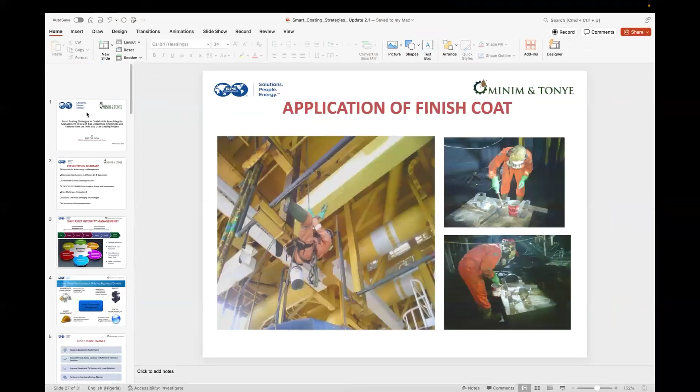So today, basically, we'll be talking about strategic coating, smart coating strategy for sustainable asset integrity management in oil and gas operations, challenges and lessons learned from INIM and USAN projects. That's what we'll be talking about. Now we have a roadmap for this presentation: the rationale for asset integrity management, corrosion mechanisms in offshore oil and gas assets, advanced and smart coating solutions, then the main topic covering INIM and USAN scope and deployment, key challenges encountered, lessons learned, emerging technologies, and finally conclusion and recommendations.

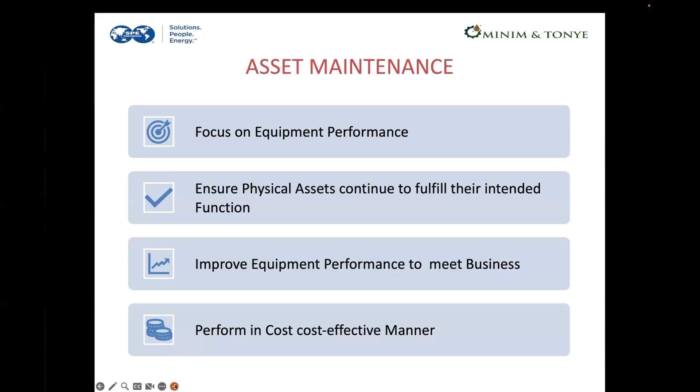People produce oil all over the world, in various places like Saudi Arabia, and everybody has different challenges that they face. Ours from the Niger Delta is quite different, so we have to make sure that the cost of doing this is within budget and is competitive.

That brings us to another topic, which is, what are the objectives of asset maintenance? What do we plan to gain by carrying out asset maintenance?

One, we reduce unplanned downtime. Once you have a downtime, you have a lot of facilities going down, a lot of costs, both human, leased equipment, and commitment to delivery.

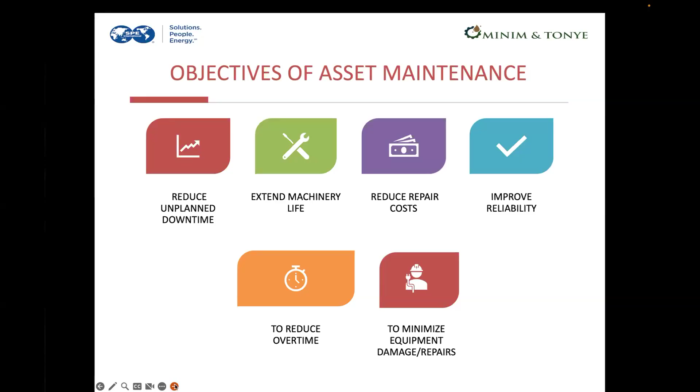Also, you can have extended machinery lifespan, which means the lifespan of the facilities on board can serve for a longer period when they are properly maintained, other than when they are left undone. We can reduce cost of repair, improve reliability, and reduce overtime to minimize equipment damage and repair.

That brings us closer to the topic that we really desire to talk about: corrosion. The whole essence of today's presentation is all about corrosion. How do we manage corrosion? So we need to understand what corrosion means and how we come about corrosion.

In simple terms, corrosion is the gradual deterioration of material, typically metals, caused by chemical or electrochemical reactions with the environment. One key factor that comes to mind when it comes to corrosion is that the environment plays a big role. It is the process of deterioration and destruction and consequent loss of a solid metal attacked by its environment at its surface.

If you really look at it, all corrosion means is the interference between our equipment, our structures, our facilities, and the environment. We can't run away from the environment, so we have to take care of what is going to degrade the facility, which is corrosion.

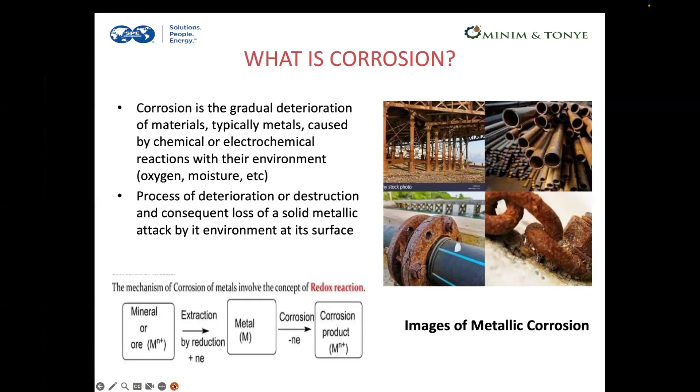Having this in mind, I know many of you understand the chemistry of corrosion, oxygen attacking a metal surface and finding oxidation. The primary thing is nature on its own wants all metals to be stable. That's why they want to get them oxidized.

If they get oxidized, they return back to a stable state and they get destroyed and damaged. So why do we have to control corrosion? As a strategy, as a maintenance strategy, corrosion control is actually a maintenance strategy that can increase the lifespan of our facility. The table here generally shows us the various categories of maintenance

and what can be done to them: preventive maintenance, coating, cathodic protection and inhibitors, purpose prevent corrosion. Various kinds of maintenance category and the purpose for which they are meant. Examples have been shown in this table.

It is my belief that this slide will be shared with you so that you can have additional insight into what we are about to talk about today. Because these are just the preambles leading us to the destination. We need to understand the reason why we are coming this way.

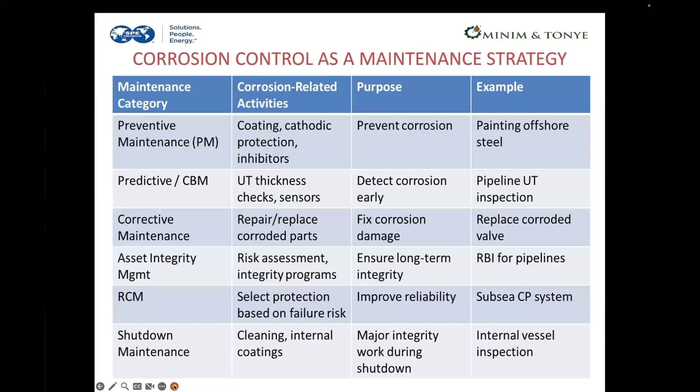That's why we dedicate today to bring insight into the knowledge we have had and share some of the challenges with you.

So what are the factors affecting corrosion? You have the physical state, the purity of the metal, position of metal in the galvanic series, nature of corroding environment, things that affect corrosion: temperature, humidity, effect of pH, presence of impurity in the atmosphere, conductance of electrolytic medium.

Sometimes the metals that you find in this facility, some of them have some level of impurity, which means they can actually get corroded more easily. Now also the location in which we are operating, some land, some swamp, some in the high sea.

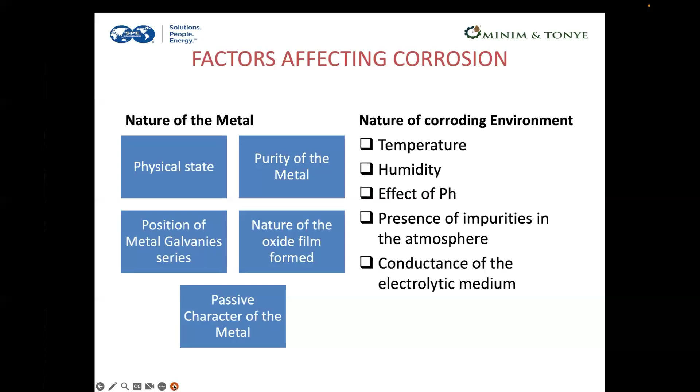But the one we'll be talking about today is deep water. Inim is in the deep water. Usan is in the deep water. I will show you exactly where it is.

So here, what are the control measures? How do we prevent corrosion? We can create barrier protections, sacrificial protection, cathodic protection, alloy formation.

Alloy formation takes place maybe at the initial part when you are planning the plant on its own. You look at various metals that can act in various ways, that can be more efficient in the process of the crude or gas production.

So protective measures, what are the protective measures that we are going to do? Modifying the environment, that's maybe very little. Corrosion inhibitors, perfect. Metallic coating and electroplating.

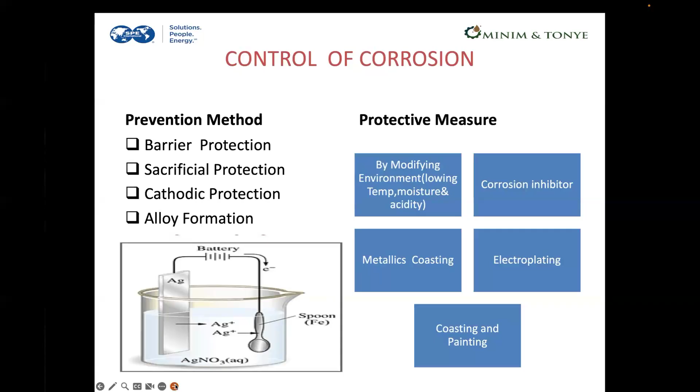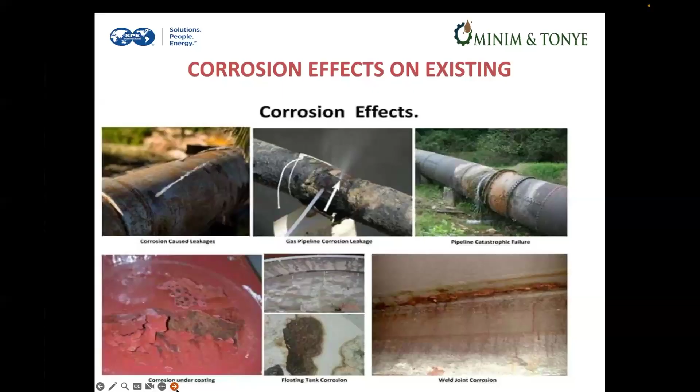Here's just a progressive picture to show you how it affects various equipment as well, and pipings, steel structures, structural members.

Why do we have to mitigate against corrosion? The reason is so obvious. The cost implication of corrosion in the oil market is very high. I think these statistics, we got them from Grand View Research, so we give them the credit for providing us this information

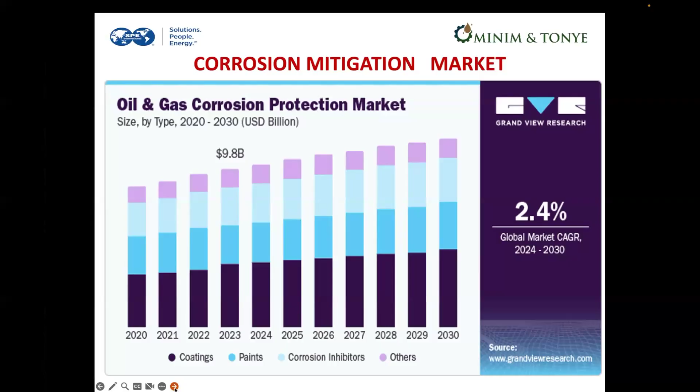of what has been happening in the past from 2020 and their projection up to 2030. These are indicators why we need to go and protect these assets against corrosion. So today's main topic, we are just getting closer.

We're getting closer to where we are going. Like I said earlier, all those ones are preambles to lead us to say, okay, what are we trying to talk about? Why do we have to do all this thing? Why is this kind of process necessary?

Then how come? Why is it costing so much? We've seen that the cost implication runs into millions or billions of dollars, according to the research that has been done. So today, basically, we'll be talking about smart coating solution models, the challenges that we have faced, and how we have been able to overcome them in a little way. So, classification of coating.

Classification of coating - you have all these academic works to show you how coating is done. Metallic coating, hard facing coating, non-metallic coating, chemical conversion, and all these thermal spray methods depend on what kind of metal you are trying to protect and the environment. You can choose from this array of methods.

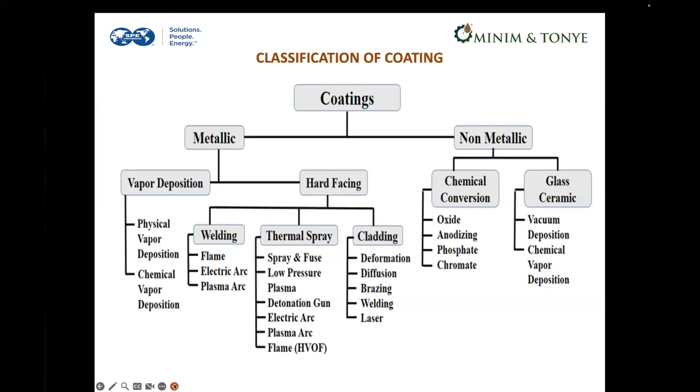So, where are we talking about? We're talking about Usan. As you can see from the slide, Usan is in the deep water in the Gulf of Guinea, located in deep block OML 138, about 100 kilometers off the coast of Nigeria. It's an FPSO with water depth of 750 to 850 meters.

It's a joint venture between Chevron, China National Offshore Oil, ExxonMobil, and Total. It was discovered in 2002 and brought online in February 2012. That is the location that we'll be talking about.

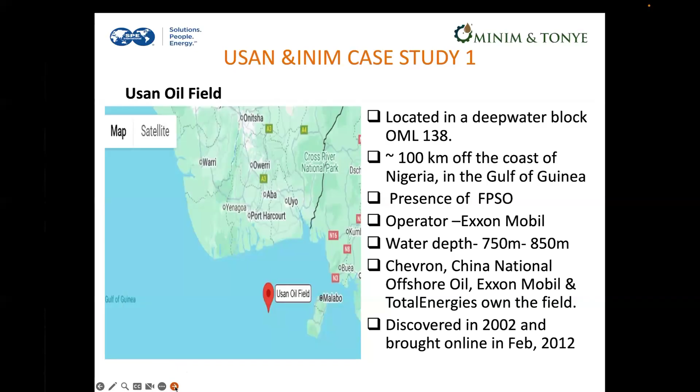It's in the middle of the sea, deep water, and it has a lot of environmental factors that affect the structure there. Unlike Usan, Inim is a little bit closer to the shore. It's offshore, not so deep in water, it's OML 67. It's a very small platform. The field uses a production platform operated by Mobil Producing.

So you can see Usan field offshore environment. This is a picture of how Usan looks like - this is exactly how the platform looks in real life. If you go to Usan, you will see it. Although what you see here is a very nice picture of it, some of it, because of the environment where it is located, has undergone some relative corrosion.

Usan field favors corrosion. Why? It's in deep water, high salinity. You can see the wave of the ocean beating on the body of the FPSO, impacting on it with high wind speed. As production keeps going on, the pipes and all the facility keep expanding and contracting due to temperature changes. Just imagine a small piece of paint falling off a particular pipe after just a little bit of vibration - what happens?

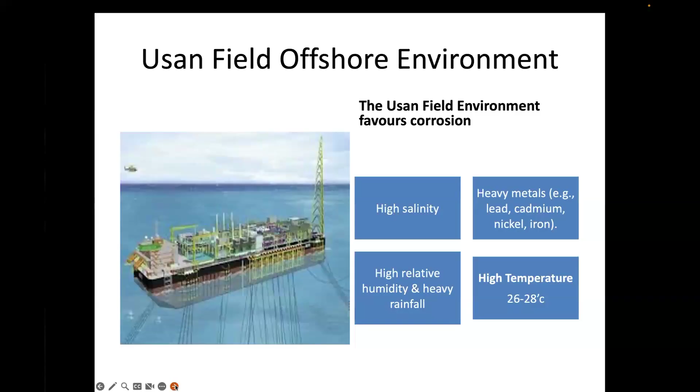Because of this, we were contracted in August 2021 to see how this asset's integrity can be maintained. One, because there are class regulations requiring class maintenance for this facility. Also, to maintain some of the structures that are already giving way - some of the pipes, as time goes on, keep expanding and they rupture. They have to do coating, pipe quick wraps, bringing some epoxy materials to arrest some of these leakages. Hence, a contract was put in place to see how this wonderful and beautiful facility can be maintained in 2021.

We are still on that platform working. It might surprise you that the challenges of the facilities are just mere human challenges, day-to-day challenges. So one of the first things is the technical team had to review the coating material required for each section, maybe international paint, some epoxy paint, and they also came up with some high insulation paints like ion paint, MasCoat, Humidur paint.

All these paints have specific jobs and they can do specific things. There are some paints that you use under what we call CUI, corrosion under insulation. Some materials corrode even when they are insulated. There are some facilities, some piping where the temperature during production gets very high. So they need special paint or special coating materials to address the needs of that particular facility.

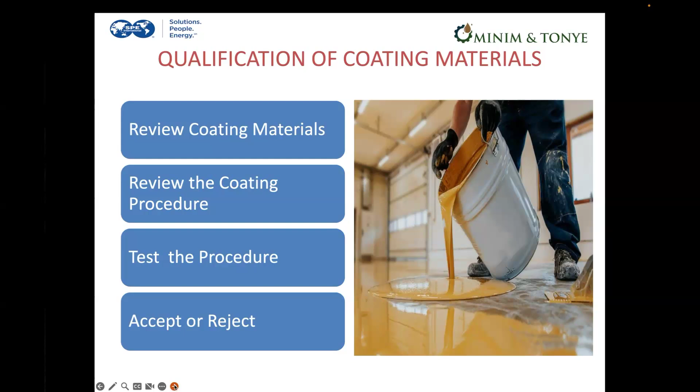So in a nutshell, the materials to be used have to be specific to each of the modules that needs attention. You can't use a general paint for everything. There's corrosion under insulation, there's passivation, there's nickel, this thing. So it comes in various shades, and that is for the engineering department to actually give direction on. Once a test procedure is accepted or rejected, then the process of applying such materials comes into play.

That takes us to the core of our experience in USAN. What were the challenges in both fields? Like I mentioned earlier, corrosion is basically as a result of weather interfering with metals, trying to degrade them. We've defined them earlier, so environmental factor is a lot of rainfall.

There's a lot of stormy situations. I've explained earlier, just to have at the back of your mind, what can trigger corrosion. Then we've also talked about material selection, that's for painting. Now we also have...

If you take a look at the various units in the FPSO, I'll show you pictures later. You have some steel structures that are about 3 meters high, out of the deck area. They have various corners, and I will show you pictures later, that you need to address coating in all those challenging areas where access is a problem.

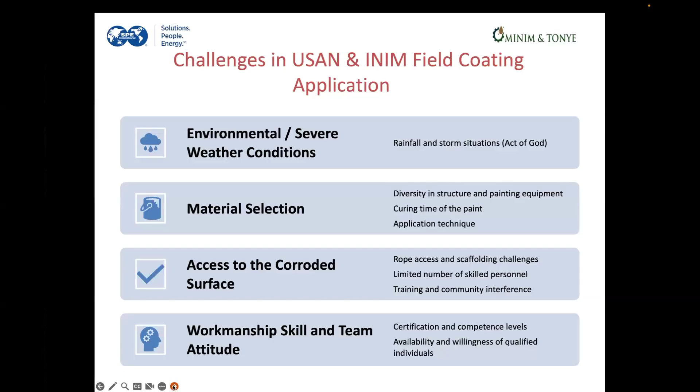Without taking much of your time, there were various kinds of coating done there. You have the Humidur coating application—Humidur is a special kind of paint. You have multi-layer epoxy coating application, caulking and passivation for stainless steel, specialized coating with MasCoat, and coating for corrosion under insulation.

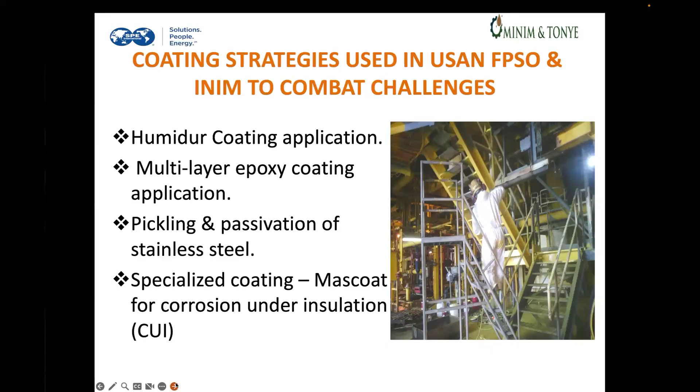Now, challenges and lessons learned from this. Some of these, like I mentioned, come from manufacturers doing things in different countries with different experiences. When we come to Africa or Nigeria, depending on the situation, things are a little different. For example, coating drums were initially stored in iced containers based on the manufacturer's representative's advice. But cold storage reduced coating viscosity and shortened pot life, which led to loss of spraying lines and inefficient paint application. This is what we experienced.

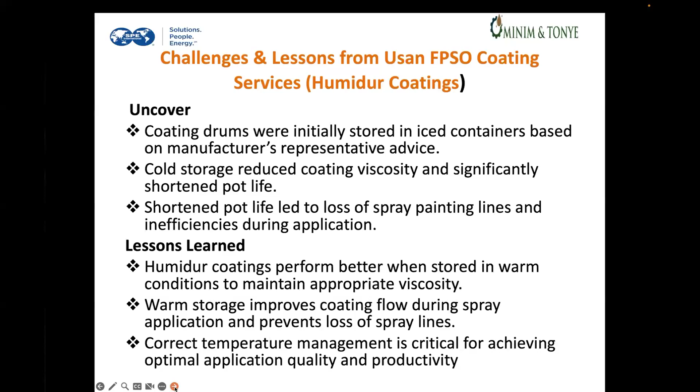So what did we do? We found out it was better to store it in warmer conditions to maintain appropriate viscosity—we check the viscosity. Warm storage improves coating flow during spray application and prevents loss of line. Correct temperature management is critical for achieving optimal application quality. When we get these results, we do knowledge sharing with the manufacturer, showing them exactly what happened, and we do pull-out tests at the initial stage and various other tests to make sure we meet specification.

We approach implemented a risk-based coating philosophy for selected plant areas, including live pipelines. There are various kinds of coating - you can have full coating or risk-based coating. Full blast coating is usually used in green field where everything is exposed. But risk-based coating, because the plant is working and you have interface with other places, means you just choose a particular spot, maybe at elevation minus 450 or 400 from ground level. You have to cordon off that area, prepare what you need to prepare for a full-scale job, and just blast. It can be as little as just 1 square meter.

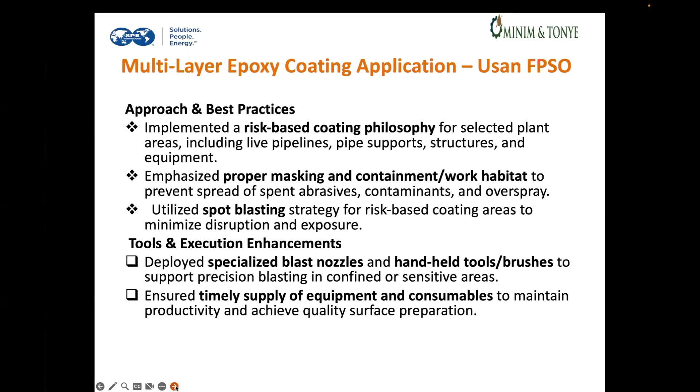We also utilize spot blasting. There's a spot blasting nozzle that can be taken from place to place, deployed for specialized spot blasting, with short-time equipment considerations.

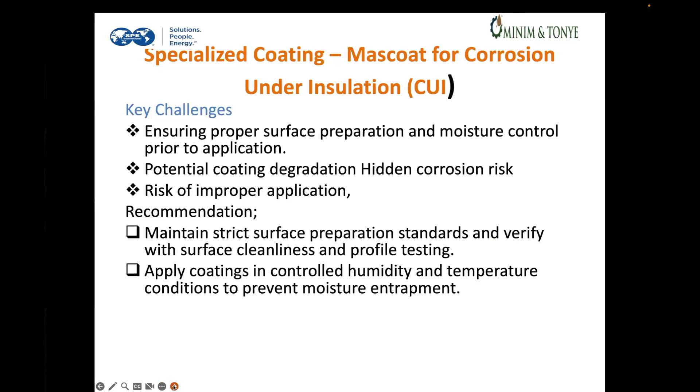For corrosion under insulation - this is corrosion of high temperature facilities. Some of these structures have temperatures as much as 200, 250 degrees centigrade, in which case we have to use special paints like Mascoat. They don't actually require too much surface preparation like the detailed risk-based coating. Surface preparation according to manufacturer's specification is a little less, and it's a very effective paint.

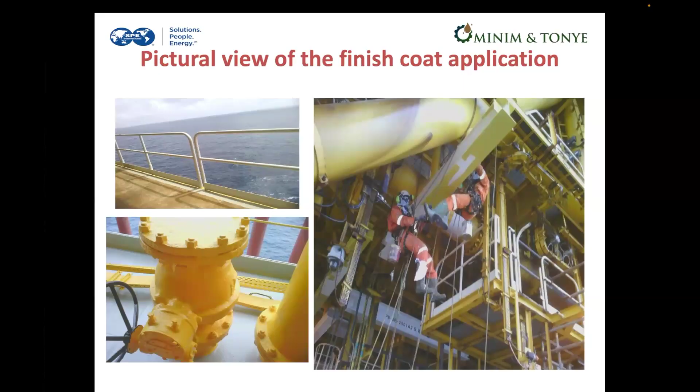So here's a pictorial view - you can see the men fully geared up trying to fix a structure at the top of one of the modules in Usan. These are our team members working at that height. You can see some of the valves that have been well painted there - that's Humidur paint for you.

You can see how somebody can be upside down using a roller to paint a steel structure at the bottom. His experience is quite different from the man down there doing his own thing. He has to pass down some of his items for them to rig it up for him - that's why teamwork, like I mentioned, is also very important.

You can see some level of corrosion at some ends of this structure. This particular area I'm pointing the cursor to is still corroded. If you have to get there, it's a different thing entirely. You can see where the man is trying to paint, and various shades of activity. All this is in Usan FPSO.

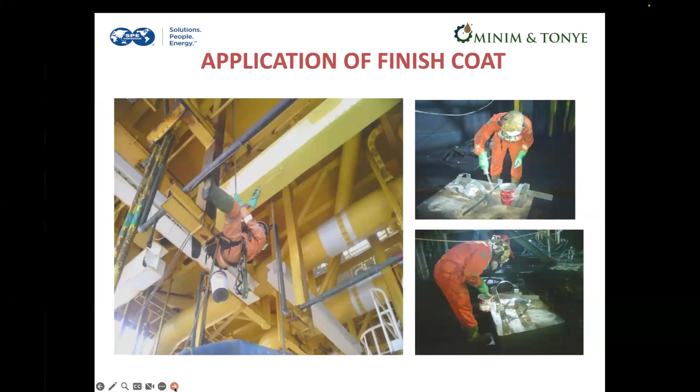Sometimes after blasting, you have to wash the structure with your head upside down this way before you paint. So it's a whole different kettle entirely, ensuring safety all the time.

Most of the time, the workforce has safety briefings. In these briefings, they are shown the tasks they need to do, well documented, not just word of mouth. They share pamphlets and read through the risks of what they need to do, how they need to go about it, and how they have to perform it for each particular unit.

So, like I mentioned, this is just a wrap-up. Key lessons are that material selection and surface preparation is critical - advanced NDT coating thickness, importance of environmentally friendly materials, strict quality control, documentation and testing, and regular offshore inspection and maintenance program.

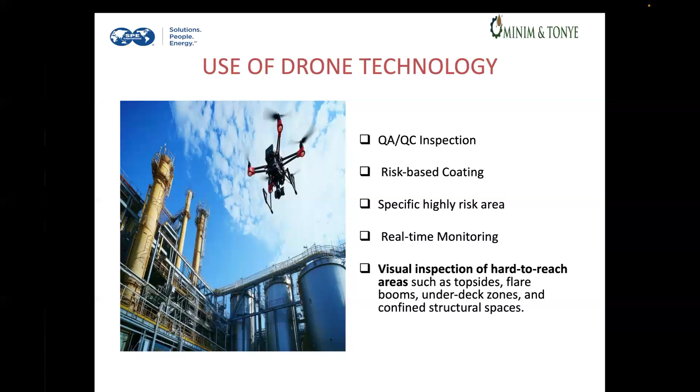In a nutshell, what are the conclusions we can draw? Smart coating means you take proactive measures to do preventive maintenance, and you plan each module of coating to address corrosion as it may arise in various units through regular inspection, teamwork, quality selection of personnel, training of the right personnel, and making sure there is adequate sufficiency of personnel.

Sometimes, if you have only 1 or 2 skilled workers, you find that as you need them in Usan, somebody is also looking for that person in Erha, and they can just be so volatile.

Some come wanting to stay as much as two weeks after training, while others call wanting to get out to a new location because they believe they're in high demand. Facilities to train these people aren't so much, but we're trying hard to get mostly young people between the ages of 20 to 25 trained in all these skills, get them in large numbers, put them to test both on land, and give them offshore experience.

It's a lot of money to get somebody certified. Maybe about 1.5 to 2 million to get somebody certified. It's a lot.

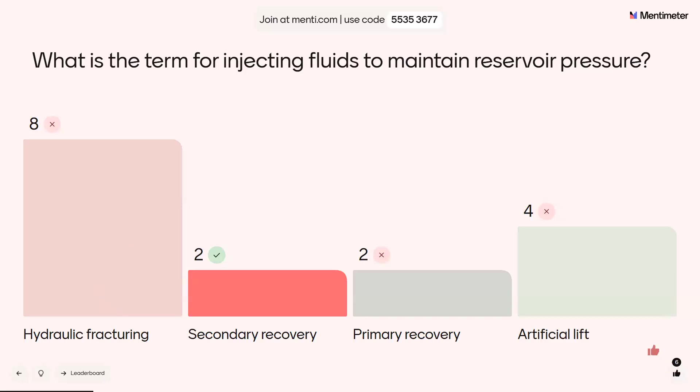Question one: What is the term for injecting fluids to maintain reservoir pressure? Let's see... so we have 8 people going for hydraulic fracturing. No, please, we only had 2 people who got the answer. From the leaderboard, we can see Boat is leading, followed by Car. All right, beautiful, on to the next question.

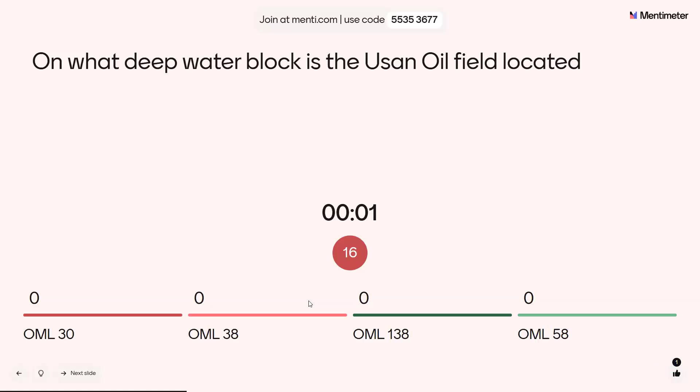Question 2: On what deep water block is the Usan oil field located? I believe we all listened to the speaker. Options are 30, 38, 138, 58. Beautiful, it means a lot of people paid attention during the session. We have 9 people getting the answer correct.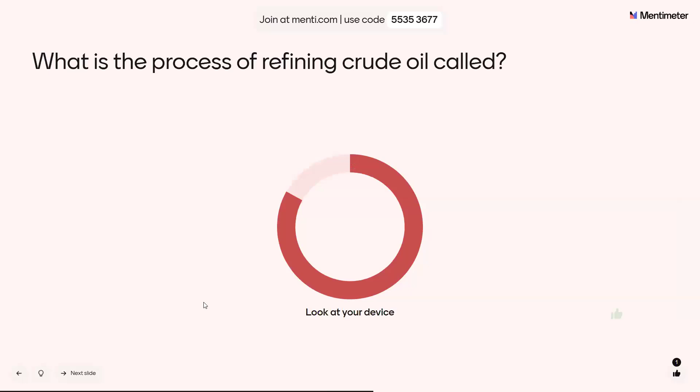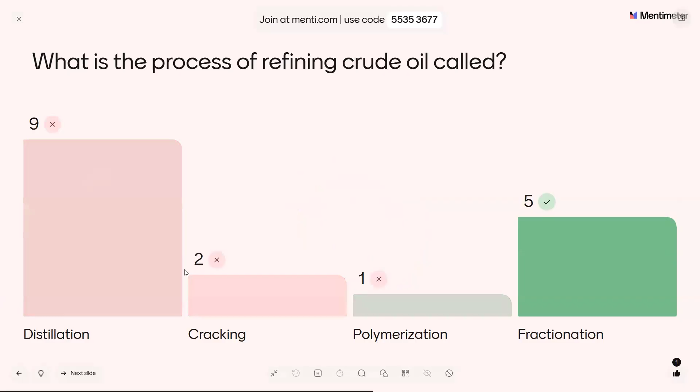What is the process of refining crude oil called? Options: distillation, cracking, polymerization, fractionation. I only had 5 people - I know a lot of people would have gone for distillation, but sorry guys, it is fractionation.

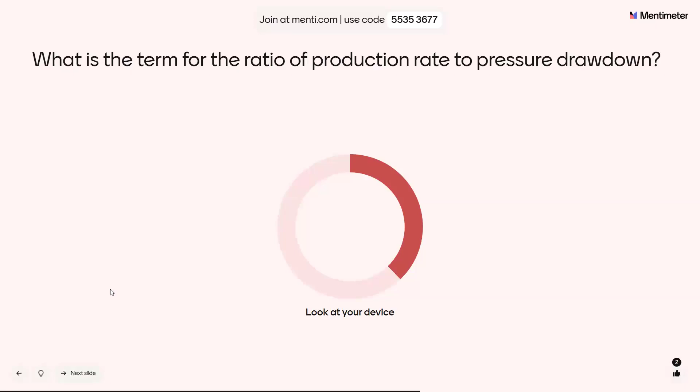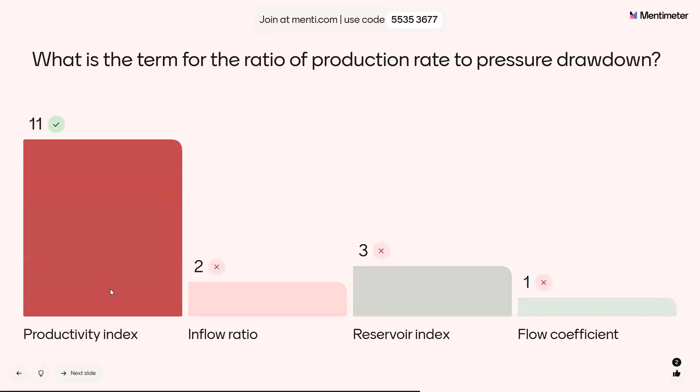On to the 6th question of the game. We have a beautiful number of people staying with me. What is the term for the ratio of production rates to pressure drawdown? I believe we should have reservoir engineers in the house now. The ratio of production rates to pressure drawdown is the productivity index. This is really, really beautiful.

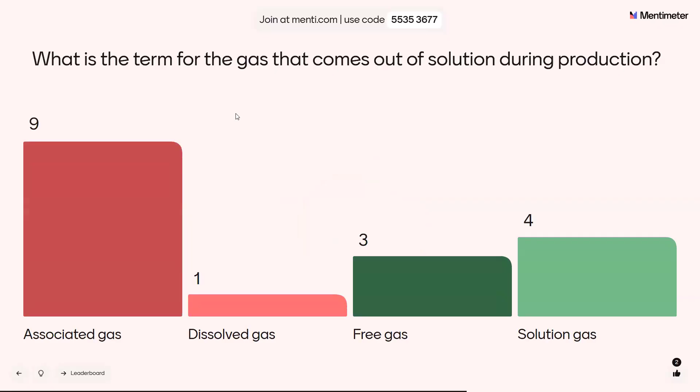On to the 7th question. If you know you are not topping at this point, you still have an opportunity - there are 3 more questions to go. What is the term for the gas that comes out of solution during production? Options: Solution gas, not Associated gas, please - Solution gas.

People have always surprised me with all the questions that came from this session. It shows that we were all very attentive. This is beautiful, this is beautiful.